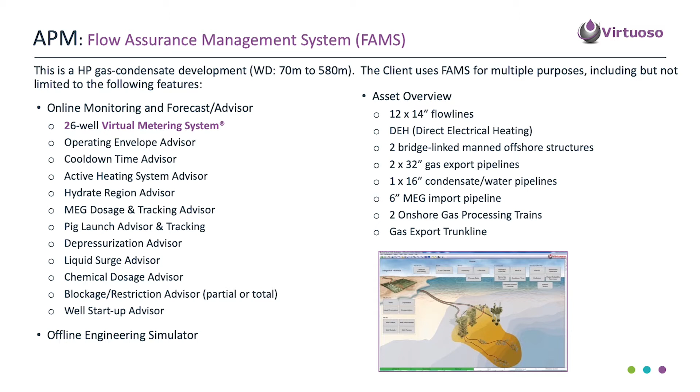Other clients have other names for this type of Virtuoso application. Chevron calls theirs Flow Management Tool, or FMT, whereas others like ExxonMobil call it PMS, for Production Management System or Pipeline Management System. Woodside calls it Production Simulator System, or PSS. Regardless of the name used, the purpose of the deployment of a Virtuoso system is the same. It provides a robust and comprehensive suite of functionalities for real-time operator advisory and asset surveillance.

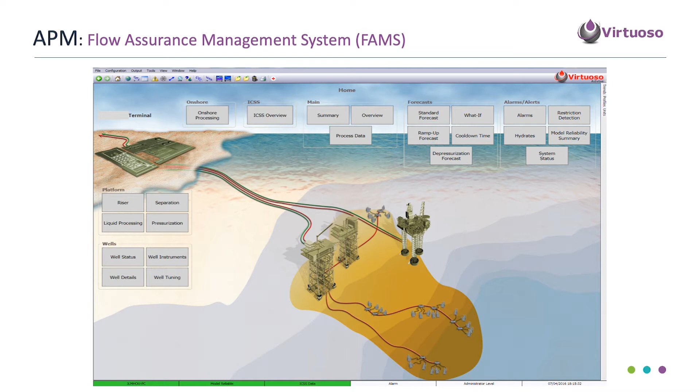For this particular example, the FAMS operators use it 24/7 for online monitoring and forecast advisory. They use our field-proven virtual metering system technology to supplement the physical meters that have been installed in the field. Wood's Virtual Metering System, or VMS, provides a secondary backup to the physical meters. It helps validate as well as advise on any well production performance issues. The system provides them with a status of the overall operating envelope of the asset, as well as where in the production network potential issues may lie.

FAMS has an individual well startup advisor to facilitate handling well startup events. Given the asset's challenging flow assurance issues, FAMS has a cooldown time advisor. This provides a forecast of what the effective cooldown time is for various sections of the production network in the event of a shutdown. FAMS has an active heating system advisor.

This asset has direct electrical heating, or DEH, installed. This system helps keep the production fluids at the desired operating conditions. This monitors where the network is operating at. It also forecasts or predicts any operating condition changes, or possible excursions into the hydrate region. FAMS has a MEG dosage advisor and also tracks the inhibitor distribution in the network.

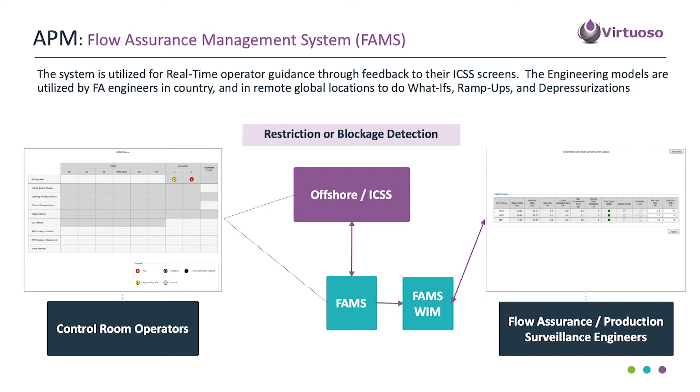FAMS also helps maintain operational integrity by providing an advisor for the onset of any restrictions or presence of blockages in the network. In addition, FAMS provides advice on potential liquids accumulation and surge. In the event of a depressurization event, FAMS has a depressurization advisor to facilitate such an operation.

FAMS also alerts and recommends launching pigs. It is designed to track the position of the pig. It estimates the arrival time in the event of a launch. And it also provides the expected swept liquid volume displaced by the pig.

For the asset operators and engineers, two display screen types were provided. One set of screens are for the control room operators to access. These control room operator, or CRO, screens facilitate ready visualization of issues and alerts. The other, more detailed screens are used by the client's flow assurance and production surveillance engineers, or SMEs. They may be accessed on the platform offshore or remotely elsewhere in the world. These screens provide the means to perform detailed analysis and planning sessions, including performing what-if simulations.

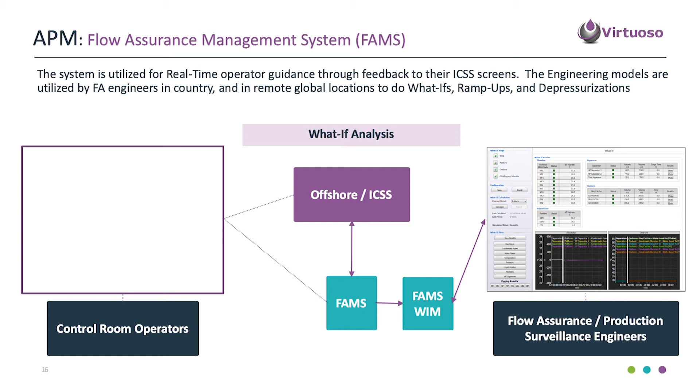In addition, the client also wanted an integrated offline engineering simulator implementation of the same robust online simulator engine used in Virtuoso. For the purpose of the rest of this demo, we will use that offline Virtuoso model to demonstrate delivered capability and analysis functions.

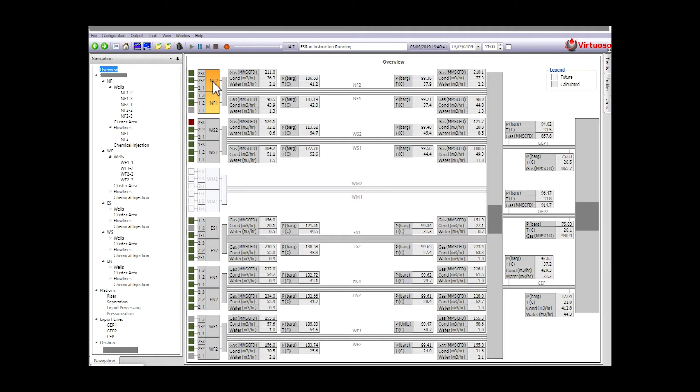In this following demo, we will start the system and load with an example scenario. It should be noted that the scenario can be user-defined, or a snapshot of the current operating conditions from the real-time system, to facilitate further investigations. The user can also break the simulation to various components for analysis. They have full flexibility in the simulation they want to run.

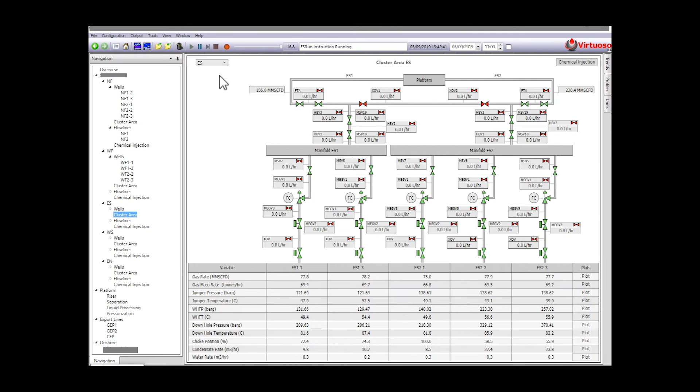In this demo, we will navigate to the main overview screen of the asset. From this screen, we see details of the various assets modeled. The integrated model includes wells, flowlines, processing facility, export pipelines, and the onshore plant. There are several producing assets we can select.

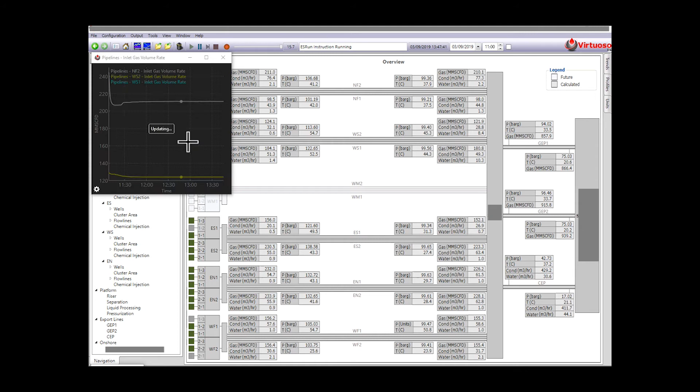On the overview screen, we can select specific parameters like pressure and see a trend plot. We can drag-drop additional variables if you want to see the trends. We can then navigate to one of the flowline screens. We can then see information about various variables for that specific flowline, including pressures, temperatures, and flow rates.

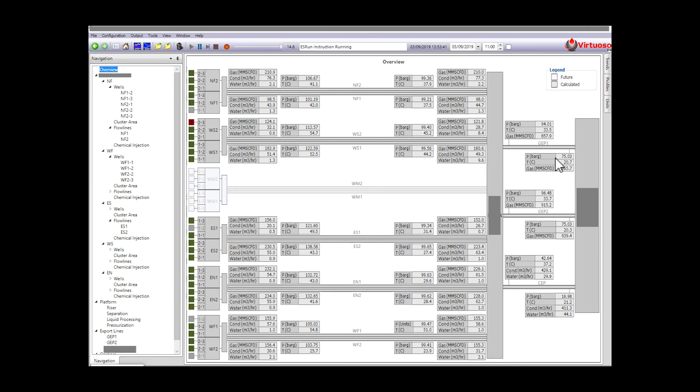On the overview screen, we can also navigate to other flowlines. We can then navigate to the receiving facilities on the platform, as the flowlines deliver through the manifolds. Next, we can navigate to the separators on the platform. Selecting one, we can then see the platform separation screens with the various components.

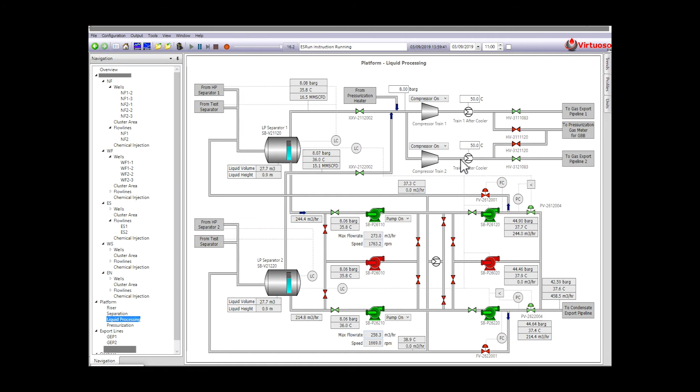We then navigate to the condensate export pipeline screen. Here we can see the various parameters, like pressure, temperature, and flow rates. On the overview screen, we can also navigate to the gas export pipelines. The screens show the various parameters, like pressure, temperature, and flow rates. There's also the pipeline schematic to show when pigs are in the line and as they progress through.

We can then navigate to the onshore receiving facility and look at the various process trains at this asset's receiving terminal.

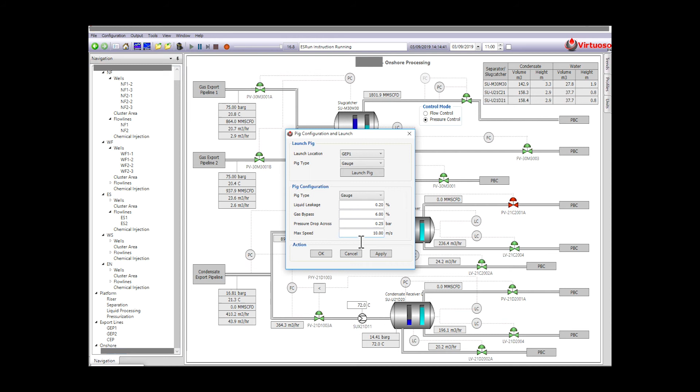The system offers several configuration options to perform the simulations, including the configuration for the DEH, as this asset has direct electrical heating. The user can also configure the pigging, as well as launch one. The user can also look at the various well parameters and things that can be adjusted.

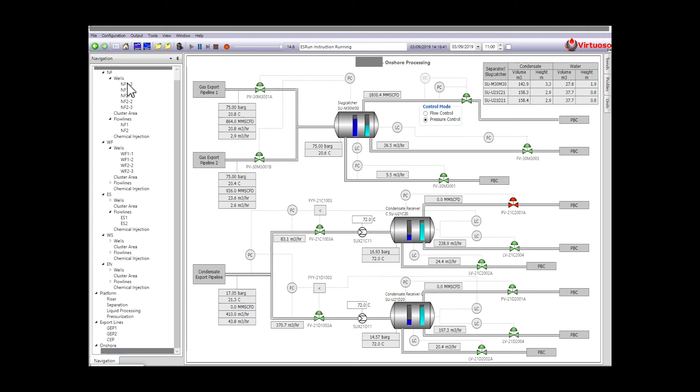The following part of this demo will show dynamically some of the cause and effect of making operational changes. In this example, we will change the choke settings of one of the wells and see the impact through the production network. If we look at the individual wells, we can select the well or wells we want to make changes on. We can see the well instrumentation details and individual flow rate calculated by the virtual metering system. We can then look at the calculated flow rate and trend it.

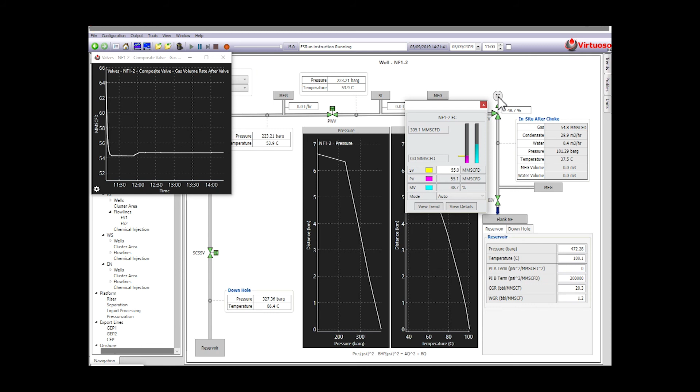Say we decide to change the flow for this well. The well is currently flowing at 55 million scf a day. If we wanted to reduce that to, say, 25 million scf, and then see what the impact of that action will be. We are basically changing the flow rate of one particular high flow rate well. We can then see the drop in production and the corresponding automatic adjustment of the choke to trim the flow to the target 25 million scf.

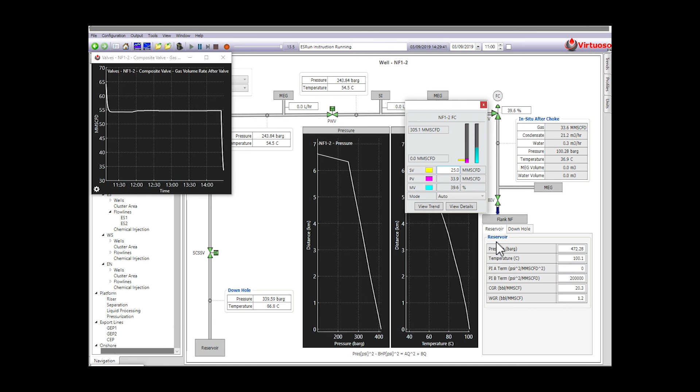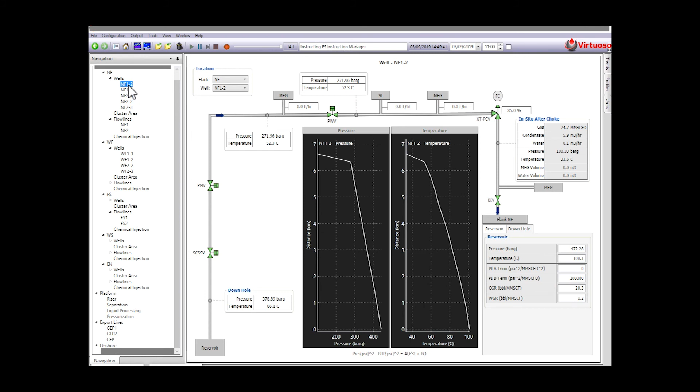On the overview screen, we can select the flowline affected by the well that we reduced the flow rate on. We can see the corresponding drop in the trend of the flow rate in the flowline. If we then decide to completely shut the well and zero out the flow rate, we can see the corresponding impact on the flowline of that action over time.

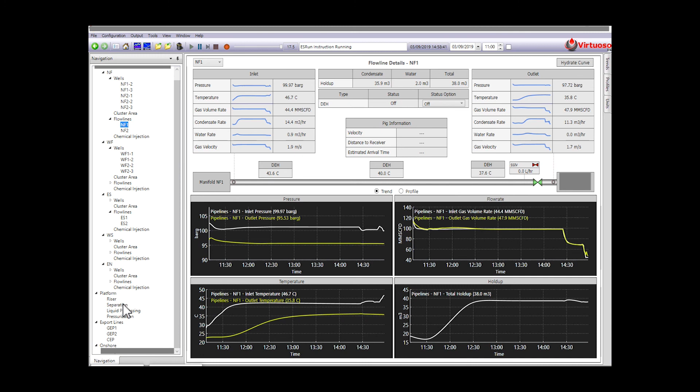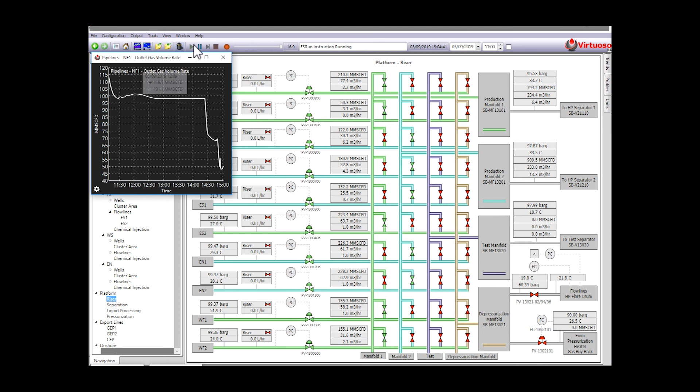The impact on the receiving facilities on the platform over time can also be seen. The change can also impact the main export flow in one of the export pipelines.

The following part of this demo will show dynamically the impact of pigging one of the export pipelines. From the configuration screen, we can send the pig through after confirming its parameters and decision to launch. Once in the line, the progress of the pig can be tracked in the system. We can see the pig indicator, shown as a blue ball.

During pigging, pig information is provided. These include the estimated velocity of the pig, distance to the receiver, and estimated time of arrival. One can also view the arrival of the pig, as well as get a forecast of the expected liquid volume to be swept during the pigging process.